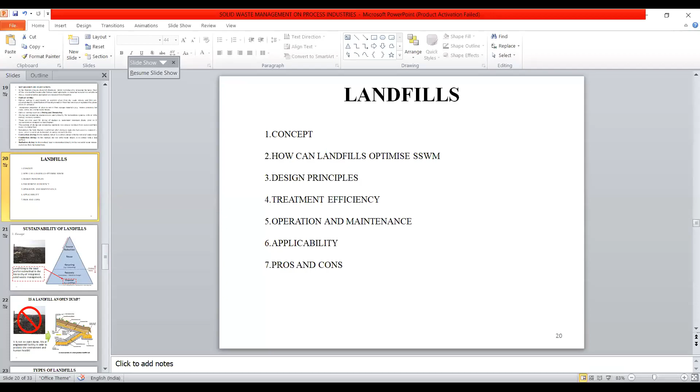Let us move to the next bit, what we call landfills. You need to understand what we mean by landfills, or what is the necessity of doing a landfill. Whenever we have a waste, a waste which can be decomposed, or which cannot be used for any recycle and recovery purpose, we are going to be throwing it in an area.

Basically, what happens? Let us say this is a waste which is generated. After segregating, there is a waste which is left out. Now, you cannot say that this waste should be thrown out. You are supposed to dispose of this waste, isn't it? The disposal has to take place. So for the disposal system, what can you do with this waste?

Either you can simply throw this waste on the land area, that is over the ground level, or what we do in the majority of cases, we form a landfill. Forming a landfill means what? We are going to be excavating a ground. In this ground, the waste which was separated and ready for disposal is dumped here. This is what we call a landfill.

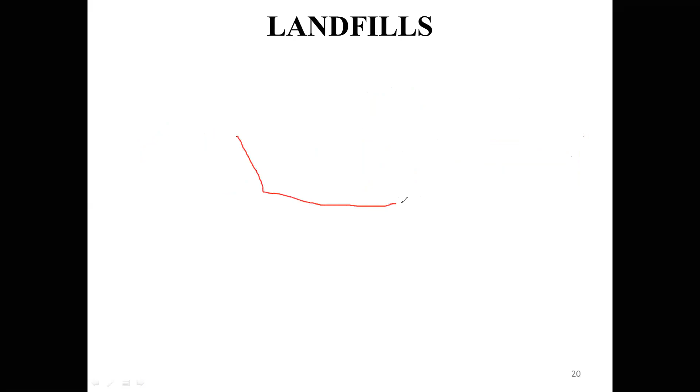Let us say you design it for 1 year, but within 1 month only, this landfill is going to be getting filled up. The reason why it is going to be getting filled up is what? Why it is going to be getting filled up is because the amount which you have calculated, the intensity of the waste which you have calculated to be generated from a locality, is going to be wrong.

That means that you thought that every day or every month, this much might be the waste generated and dumped in the landfill. But what is happening? Every day, every month, this much amount of waste is going to be getting generated. You have underestimated or you have wrongly estimated the quantity of your waste. Depending upon the quantity of the waste, the dimension of your landfill is going to be getting decided.

Now, you need to understand how these landfills are going to be working, what are its advantages, what are disadvantages. There are many things we need to understand, right? Because if a landfill is not designed properly, it is going to be leading to n number of problems, very hazardous problems. Okay, but before we go in detail, let us understand this one in detail.

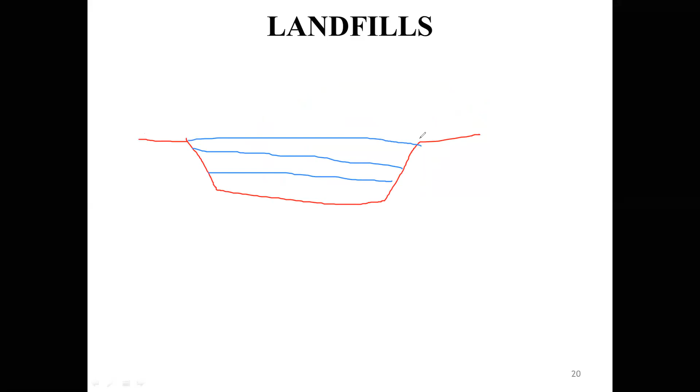Right. Let us say this is the landfill now. Let us say you have dumped the waste over here, and it has been covered also, right? Once it has been done, let us say you have covered this with some component, some amount of soil or some layers you have put over here, then you have compacted. Now tell me, just try to understand what happens to this waste which is decomposing.

As the time goes on, this decomposition leads to leaching of chemicals. That means that as the decomposition takes place, there might be some rainfall. While the rainfall takes place, the water starts to percolate within the ground. From the ground, it comes to the waste. From the voids of one waste to other waste, it is going to be percolating. While it is percolating, it carries all the toxic chemicals which were generated while the waste is going to be getting decomposed.

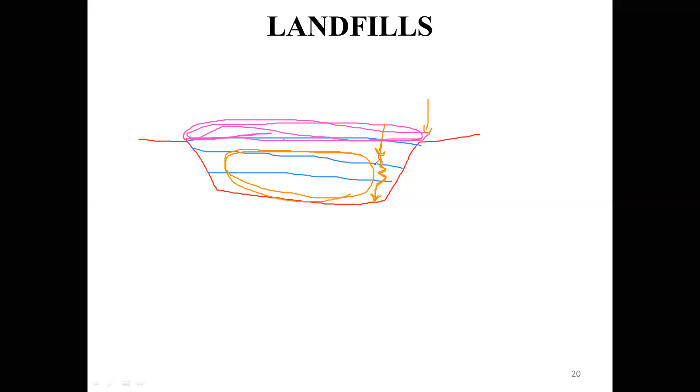Then where it goes? When the percolation continues, this further goes into the ground. Then the contamination of the soil is going to be taking place. When this toxic chemical reaches the water table in the ground, then the contamination of water is going to be taking place.

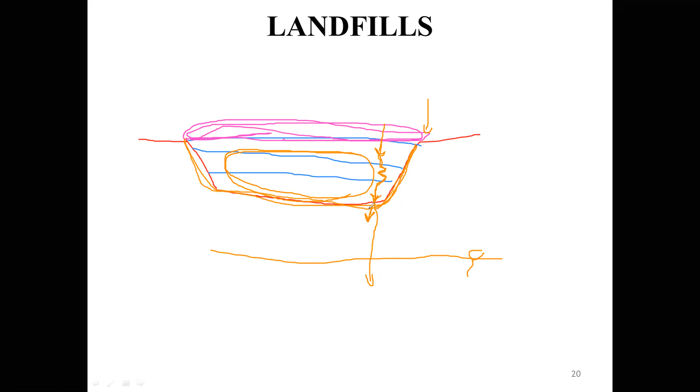So when you design, you should know all these disadvantages. If you are not preventing them properly, if you are making those chemicals or water which is going to be getting collected in this landfill move further in the ground, then there are always hazardous consequences of contamination of the soil and contamination of the water. So what happens? Let us say today it has been contaminated. After 1 year, 2 years, 3 years, the complete water is going to be getting contaminated.

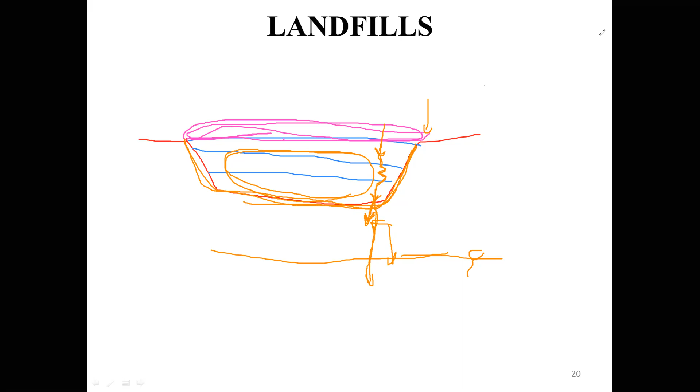The best example, should I tell you? Do you remember? Let us say this is your site, or this is the location of your house. Let us say the building is at this point, right? And your septic tank is at this location, right? What do you say? Do you prefer to go for a well or a borewell at this point?

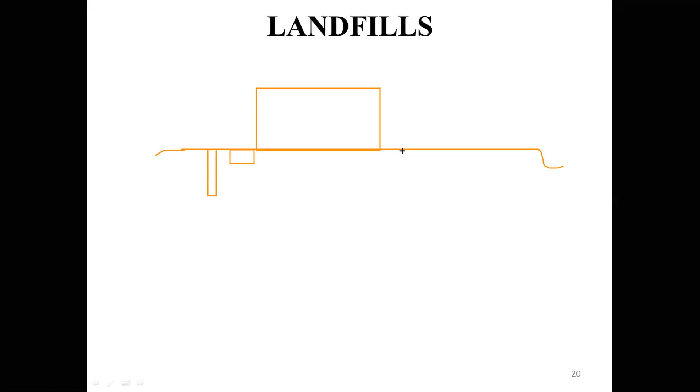No. Everybody says that it should be at the other end or the other corner of the house. The reason is what? Because we say that when there is going to be any leakage, might not be leakage in a higher quantity, might be a leakage in a smaller quantity, but at some point of time this leakage is going to be leading to the contamination of water.

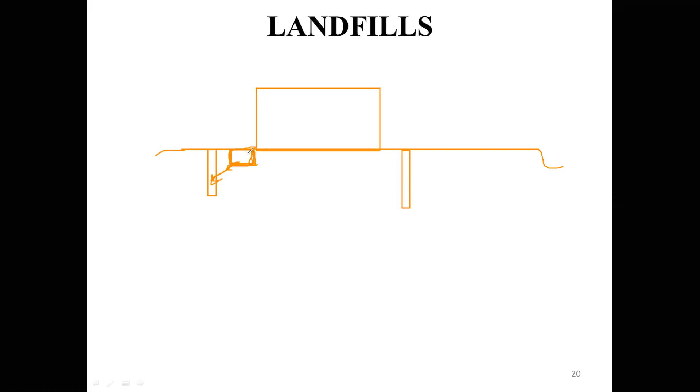The same is what is going to happen with the landfills, right? Let us say this is not a septic tank, this is your landfill. These landfills, if they are not lined properly, or if the design process or maintenance process is not taken properly, then there is every chance or every possibility that this contamination is going to further lead to the contamination of your groundwater. So this is the reason why they should always take a preventive measure to make sure that this leakage is not taking place at any point of time.

So that is what you're supposed to read in this landfill. In this landfill, you need to understand the concept of how a landfill is going to be working, or efficient working. See, working doesn't mean that it should simply work. Everybody works, right? Everything works. But the working or the concept of principle should be understood thoroughly, because you are designing this one, right? If you don't design it efficiently, then it becomes a hazardous thing. So the concept you have to understand.

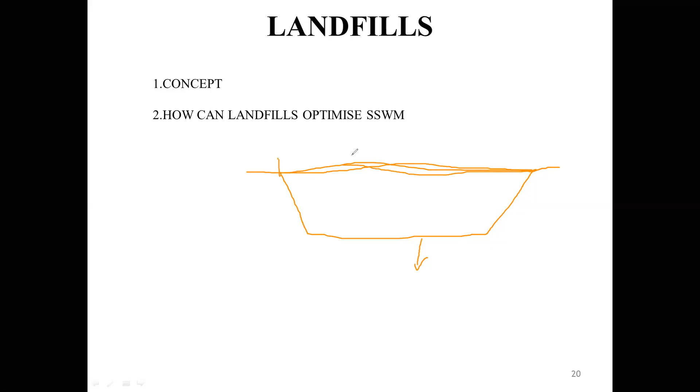Then how can you optimize the landfill in a solid waste management system, right? See, optimization is very much important. Optimization means to have the maximum or the efficient working of your landfill. I told you, it is not only the soil or the water below the ground level or below the landfill which is going to be getting contaminated. Also, if this has not been covered properly, what happens? Let us say you have laid only a small amount of soil. In some due course of time, the soil is going to be getting compressed.

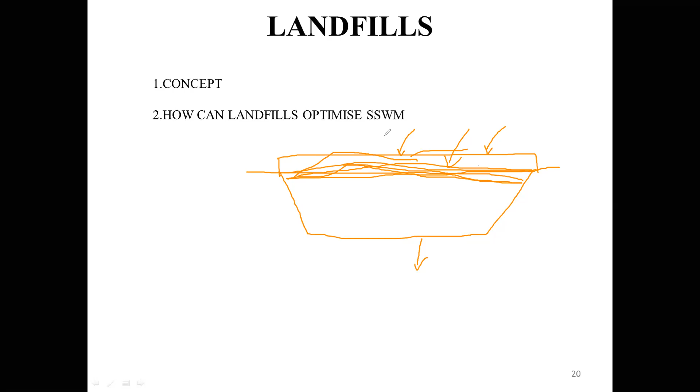As it gets compressed along with the soil, the disposed material in the landfill is also going to be getting suppressed. When it is suppressed, the soil which was laid over there is also going to be getting suppressed, and all the solid waste which was there is now going to be exposed. When this is exposed, this leads to breeding of flies, breeding of different harmful bacteria, which leads to attracting animals and birds, which leads to spreading of diseases. Even the foul smell is going to spread at a higher quantity. So this is going to be leading to very hazardous consequences once it is not taken care of properly.

So you have to take all the measures or all the steps to optimize it, to use it to a maximum efficiency. If it is working thoroughly, if it is working properly, then automatically it is going to be giving you good efficiency or good results. So you need to optimize this, right?

Okay. Then you need to understand the design principle. Once I say that it has to give me the optimized value, or the landfill gives me good efficiency, then I should know what the design principles are. You're not designing over here, but you need to understand the design principle. Design principle means on what basis, on what criteria, on what conditions, on what environmental conditions, on what ground conditions, and on what waste conditions the waste should be conveyed to the landfill. All those we have to study over here.

Study how I design the dimension of this landfill based upon the property of the waste which we are going to be dealing with, based upon the physical characteristics of the waste, based upon the environmental characteristics of the landfill location, right? See, you cannot simply locate a landfill in a fertile area, because, God forbid, if at any point of time there is any amount of leakage, the complete fertile land is going to be getting contaminated.

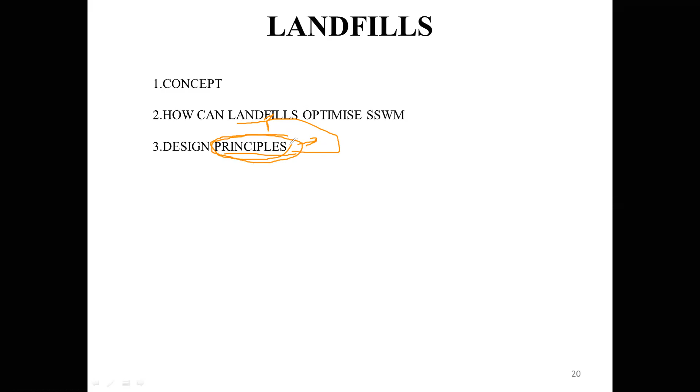Or you cannot propose a landfill near a water source or source of water, right? Or you have to follow design principles. So even near a good ecological system or a good ecological area, you cannot simply propose your landfill, because it is going to be deteriorating the environment and the aesthetic appearance of the environment. So all these basic design principles have to be studied.

Then you need to understand what is going to be the treatment efficiency. Based upon this treatment efficiency, we can analyze how much amount of chemical is being generated on a periodic basis, right? So you need to know the treatment efficiency. Treatment efficiency means, as we know, when you are disposing any waste on a landfill, the waste which is generated undergoes some different processes.

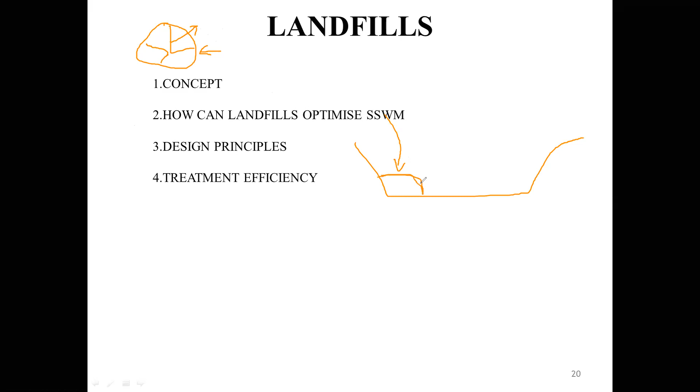There might be segregation, right? It might be compaction or volume reduction, right? All these basic treatments are going to be given. The need of giving this basic treatment is that we want to make sure that whatever waste we are disposing on a landfill is given some treatment, so that it should not generate harmful chemicals, which, if generated, would decrease the efficiency of our landfill. So the treatment efficiency should be analyzed.

Let us say this is the waste which is going to be put onto a landfill. From this waste, let us say we have removed the hazardous waste, right? Or you have taken out the material which decomposes over a long duration of time, or you have removed the sanitary waste in the segregation part. Let us say you have only waste comprising paper, degradable plastic, and cloth materials. So what happens here?

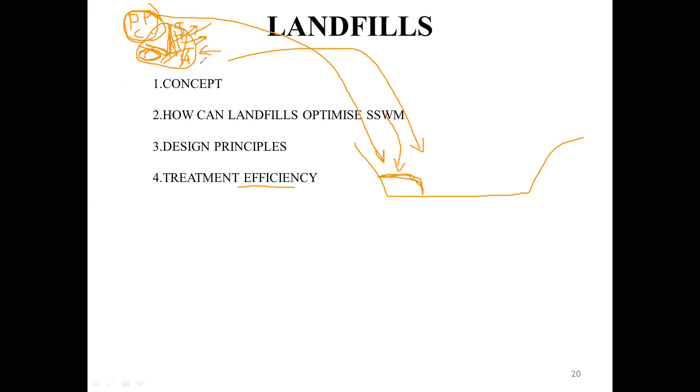You have already removed the waste which leads to hazardous conditions. Hazardous waste you have removed. You have removed the sanitary waste, or the material which decomposes over a longer time. So in segregation itself, you are giving some treatment to the waste being taken to your landfill. Now if you take the waste at this point and the waste in the prior condition, both characteristics are different.

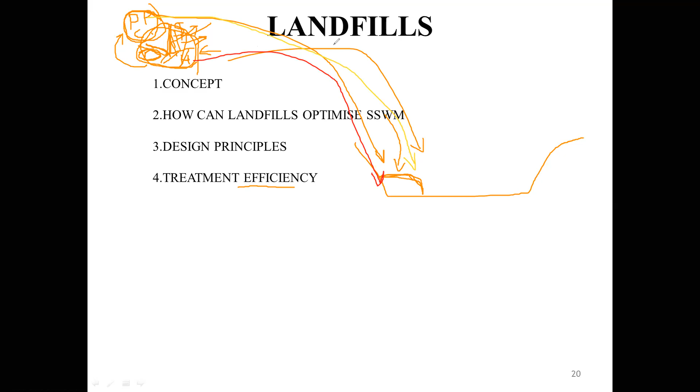So in one way you are treating the waste. Once you treat this waste, the efficiency increases. The waste before you applied the segregation process and after, both have different characteristics and properties. This helps in understanding the different treatments you are going to give to this waste, right? So it improves the efficiency. The efficiency depends upon the treatment we give.

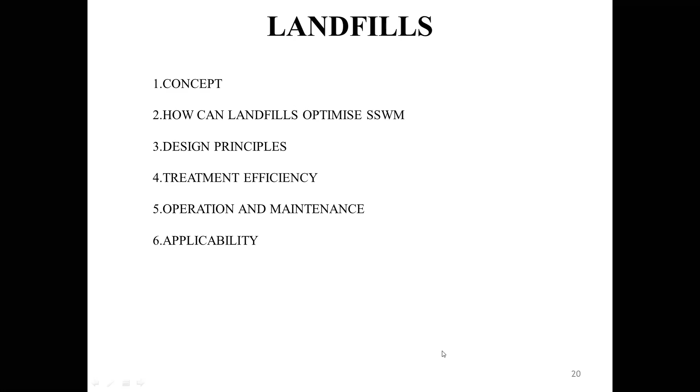Then you have O&M. Of course, operation and maintenance always plays a very important role. How you are going to operate, what methods you take to operate, all that plays a very crucial role. And its application means how best you use this, how properly you apply techniques. All those things are what we are going to be taking in your landfill and land formation, right? This is all what you have.